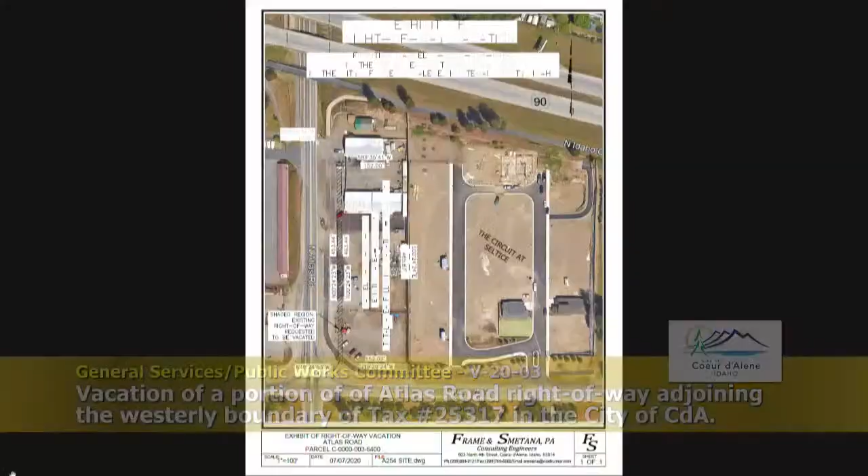It was really surprising looking at this in the staff report at how far over that right-of-way was. Where's the property line for that? The existing property line, if you can see the hand, goes right straight down. The trail is a little deceiving because this doesn't show the updated Seltice Way project, which has a trail right in this area. Also, that trail that's showing is still there, except it's been moved slightly on the corner to get out of private property. There's still a lot of dirt between the vacation and the trail, though. Is that city-owned? Yes, it's very wide. I think the Parks Department wanted about 5 feet for future trees for that project in the right-of-way there. So we could have probably got a few more feet, maybe 15, but it was agreed on to do 10.

Will the widening or update of Atlas that we've been discussing for a while affect down here as well? I apologize if you don't already know that. I've been working on Atlas, I've been here for 21 years, and I know we've been trying to work on Atlas for a long time. I haven't heard the latest on the Atlas improvement, except Chris Bosley mentioned it, but it's a little tight underneath the bridge here, the overpass for I-90, so I don't foresee us getting out any wider than we are. There's probably plenty of right-of-way there.

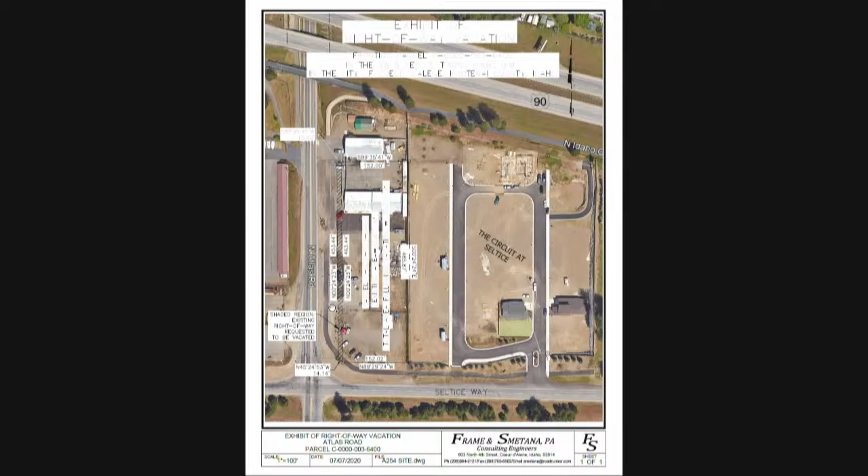That had your question. I had heard from the owner, I'd assume it's still the owner of that property, and they were considering - you said a gas station, but a grocery store kind of thing, probably like a Piggly's or 7-Eleven or whatever they call them. I know that's not part of the request here, but I think that's really needed out there. There's really hardly any commercial services, so if he needs it, then yeah, let's do it. Yeah, it would help, for sure.

Good. Kiki, any questions? I got nothing on that one. I'll look for a motion to proceed with the vacation process as outlined in Idaho Code 50-1306 and set a public hearing for November 17th, 2020. Second. It's been moved and seconded. Other questions, comments? All those in favor? Aye. We'll put that on the consent, please. All right, thanks, you guys.

My favorite area, the water guys. Well, next to the sewer guys, my second favorite. Oh, come on, it's the same water, Woody. Same, jeez, we're on the clean side. Come on, right. Welcome, Terry Pickel.

A little story about the water department. Thank you, council members, for allowing me to come before you today. I'm going to give you a little education on what the water department does. This is just kind of a brief synopsis of it, even though it's 44 slides, so I got lots of pictures for you, Woody. Greetings from our city water department. We are 23 employees strong. We do employ up to about 6 part-time people in the summertime to do meter maintenance, fire hydrant maintenance, and help the crew with construction.

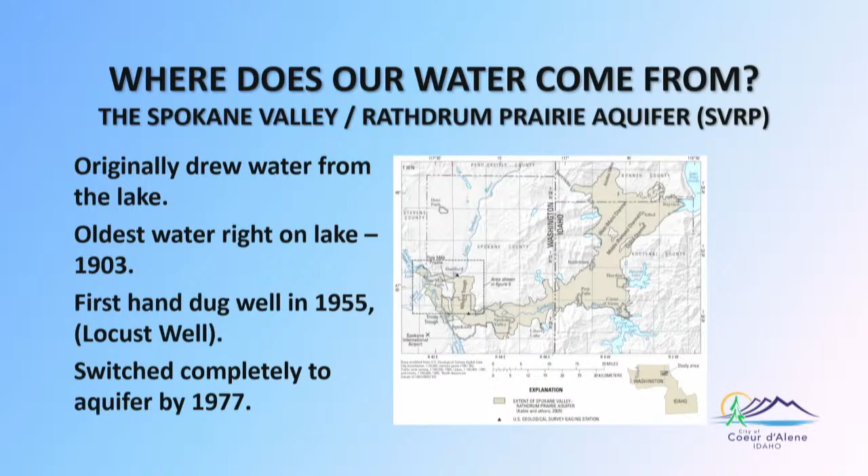Our first hand-dug well was constructed in 1955. That was the Locust well. The next well was 4th Street, and it was hand-dug in 1966. And then after that, they went to mechanical means. We switched over completely from the lake water to solely the aquifer in 1977.

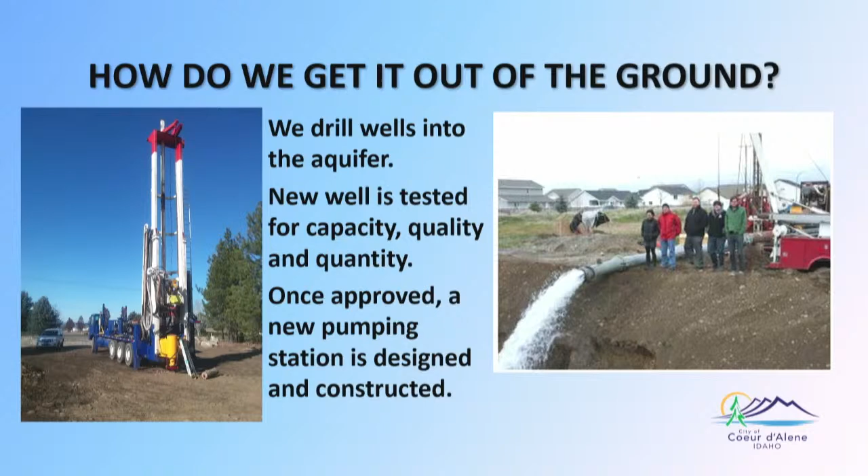So how do we get the water out of the ground? Of course, we drill wells into the aquifer. The new wells are tested for capacity, water quality, and water quantity. And once they're approved through DEQ, we design and construct a new pumping station. The wells pull the water from the source and push it into the distribution system.

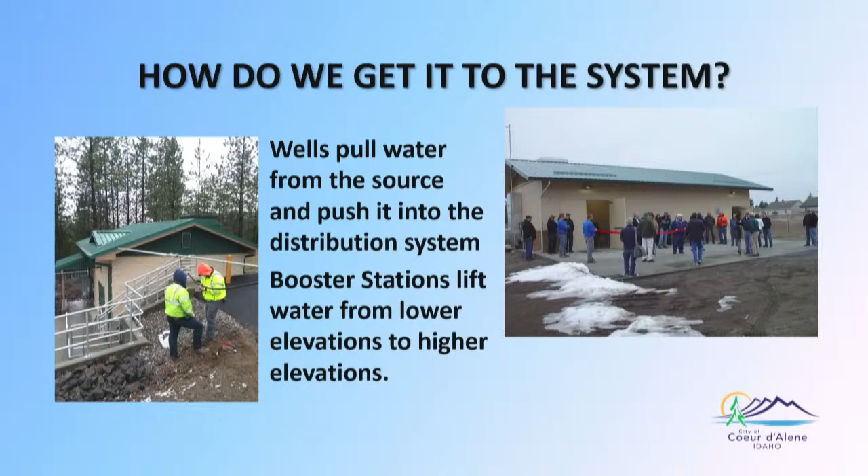Ours is a little bit different than some of the systems. Some push directly to storage. Ours pushes into the distribution, and excess goes to storage. Our booster stations lift water from one lower elevation to a higher elevation to serve some of the outlying areas around the city.

All of our wells utilize vertical line shaft turbine pumps. These have the pumps down in the ground with the motors on top, which makes it a little bit easier to work on. Typically ours are 250 to 600 horsepower, so pretty powerful pumps. They'll do up to about 4,000 gallons per minute, each one of them.

We have booster stations that typically use centrifugal style pumps. They're the best type to use to create pressure, and those usually are 20 to 50 horsepower.

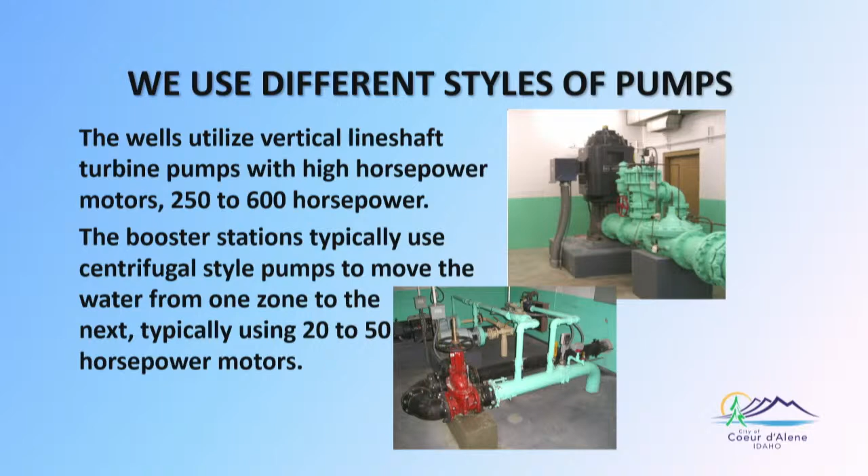Treatment is not really needed. Our aquifer is so pristine that a lot of the areas around the city do not chlorinate. We do because of the size of our system. We have such a large system that the water's out there for a greater extended period of time.

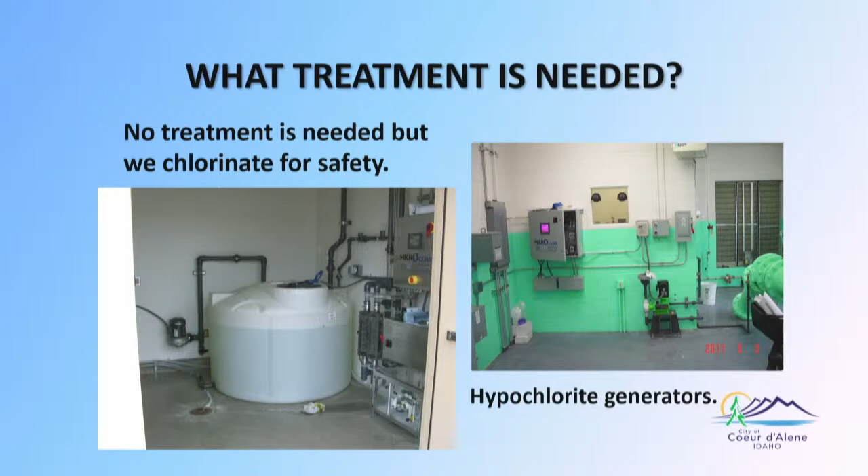So we do use hypochlorite, and these are hypochlorite generators. We used to use gas, which is very, very dangerous. We switched these over, so we're creating a very weak bleach solution, very safe to operate. What we utilize is we take table salt, basically, and run electricity through it and break it apart. That creates our liquid chlorine. Very efficient — we only produce what we need on a daily basis.

What happens to the sodium? Huh? What happens to the sodium? It breaks down and goes back into a brine solution that we end up wasting. Okay.

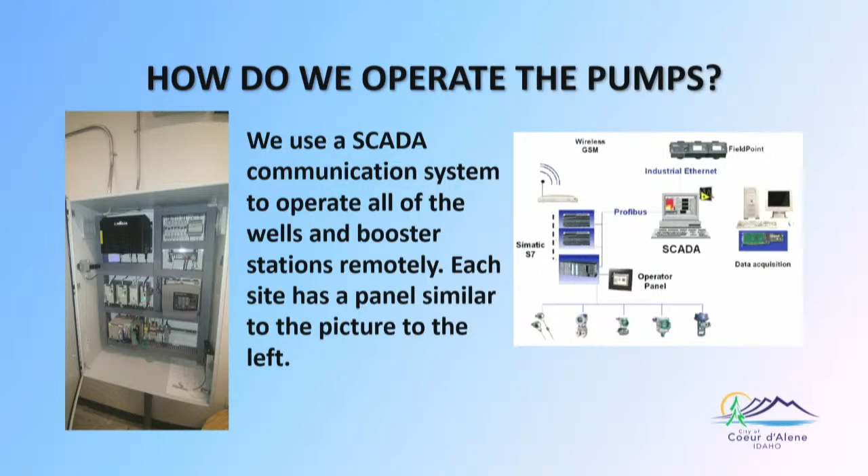We utilize what's called a SCADA communication system to control all of our pumps remotely. SCADA stands for Supervisory Control and Data Acquisition. This is an example of one of the panels that we have at each well and at the water facility to control the entire system. We can access it remotely through laptops or through our computer screens.

We use radio communications between the panels, between the wells, so we've got to have pretty much line of sight, and sometimes we have to install towers. This one is at the old utility site, about a 66-foot tall tower. We're moving it this week up to the other site.

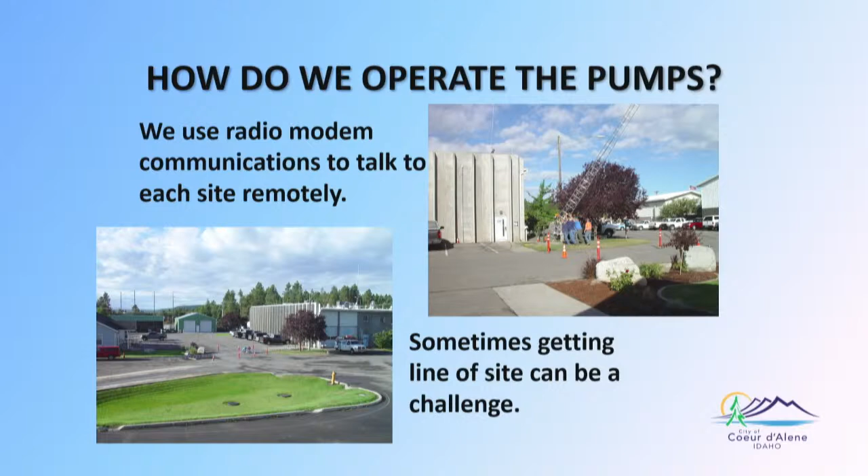We use storage facilities to store the excess water. This is the industrial standpipe being constructed, and I have a very unique video. They constructed the top of that tank inside the tank, then used a cushion of air to float it to the top and welded it in place. I have a video if anyone's interested in seeing that.

That is so cool, very unique. When they got it to the top, a guy stepped out on top of it and controlled the valve to have it float there while 7 guys welded it in place. Pretty gutsy move. Here's a view from that tank looking east over the beginnings of Hawk's Nest, and you can see the Prairie standpipe back in the distance.

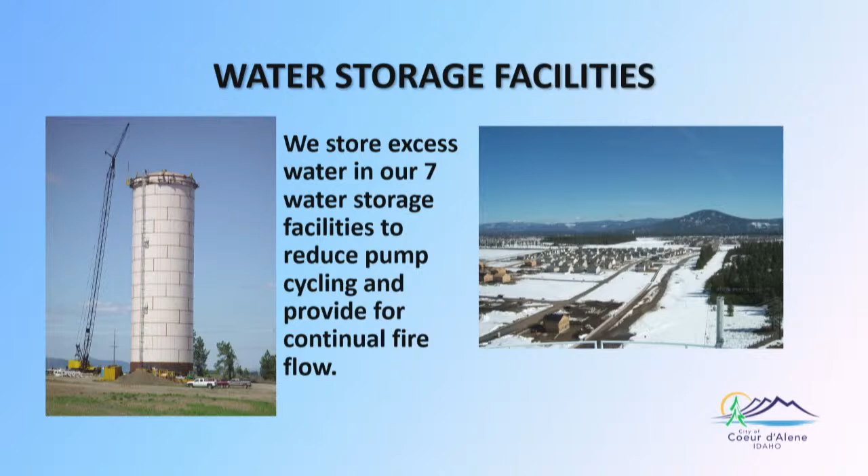We try to keep these tanks as invisible as possible, so we utilize paint schemes to make them blend in as much as possible. The industrial standpipe is seafoam green, so it kind of blends into the sky. We've had people comment that they didn't even know the Prairie standpipe was there and lived right below it. So it does help, but it doesn't always work.

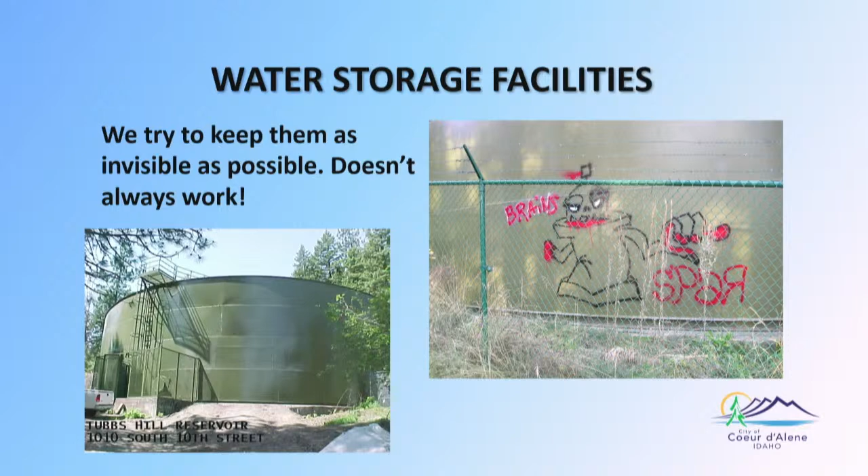You can see we get some tagging every once in a while. We've put up cameras to help reduce that, but they still are brave and go through the fences and do their damage. So we take a kind of look at those.

Where does the water go? It goes through about 305 miles of pipeline. That's what we have in the ground, ranging from 2-inch to 24-inch. We have a lot of plastic, a little bit of ductile iron. We're trying to get rid of the steel and galvanized, and we have about 100 miles of AC pipe still in the ground that we're working on.

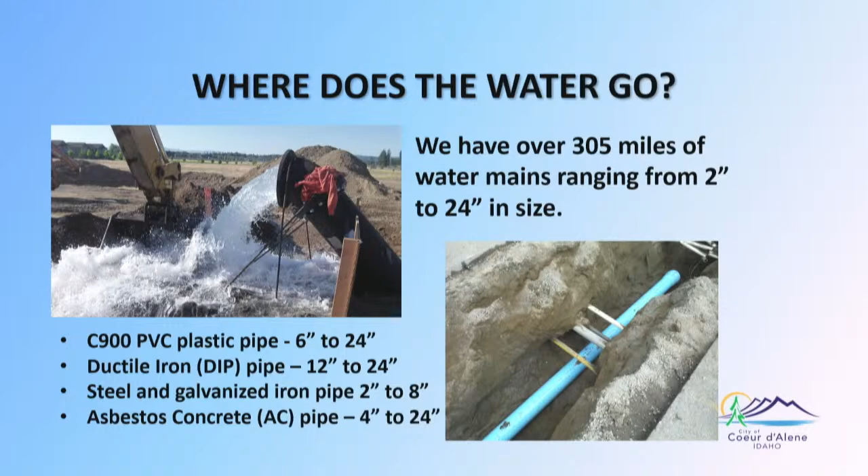New water main construction is done by contractors. No, this is not a California contractor. This was actually the end of Shattuck Lane when they originally constructed it. That's how much they raised the grade in that whole subdivision.

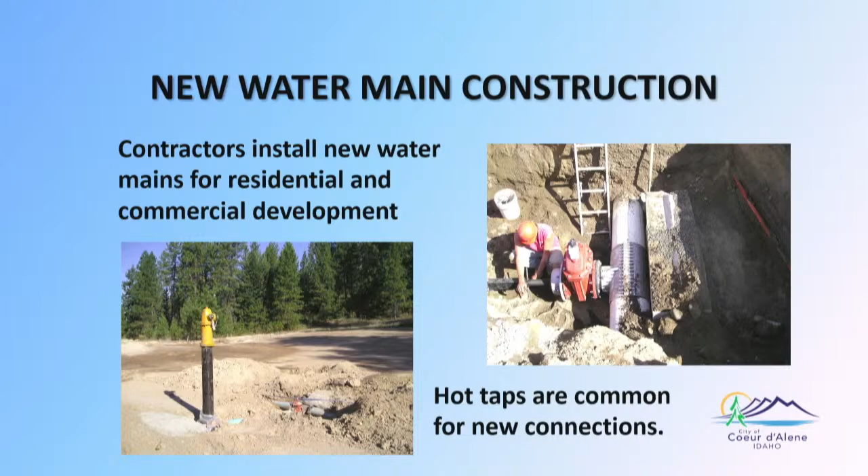Hot taps are typically done on all the new mains, all new main connections, so that we never take a water main out of service if we can help it, because it creates a whole new set of problems we have to go through.

We do routine water quality sampling on a monthly basis. We test 50 water quality samples a month, plus we test for 96 different contaminants on an annual basis.

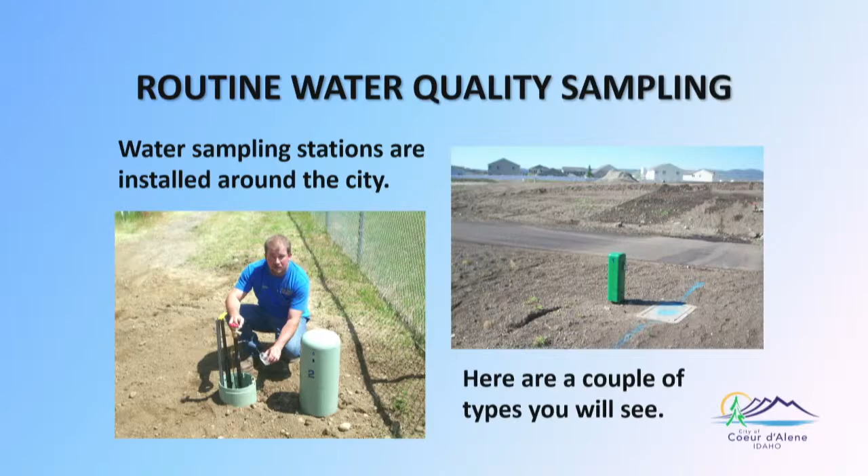Question: do you test the pipe, the water running through the pipe, or different water running areas through the pipe? That's what these little stations are for. They're actually connected directly to the main. Instead of having to go through a house to test them, we pull water directly off of that main, which makes it a lot more efficient for us. We have about 47 of these stations around the city right now, and we're adding more with each new subdivision.

We put service lines in from the mains to the houses and office buildings to get the water from the mains to the buildings.

1-inch and 2-inch lines we can actually do with trenchless technology, so we can punch a water line under a street without having to do too much damage to it. Anything 3-inch and larger has to be open trench at this point. There is technology to do larger - we did try a 6-inch fire line underneath Northwest Boulevard, but it's still a little problematic to deal with. You have to know exactly what you're doing because of the type of pipe that has to go in.

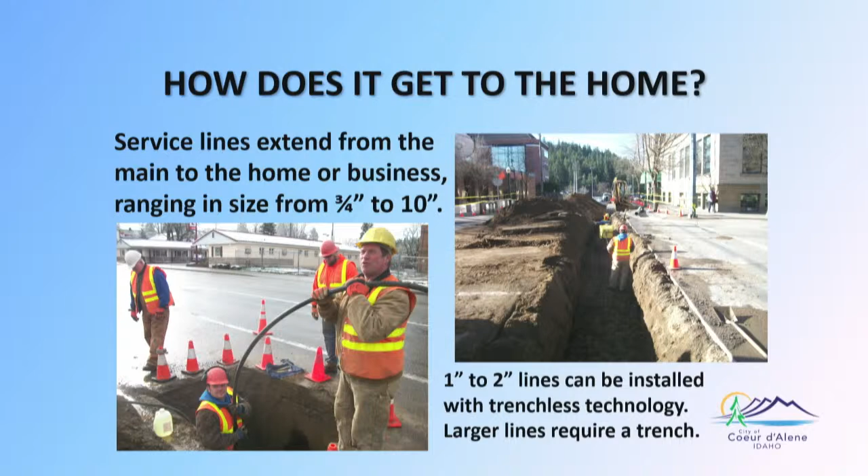That's what we're looking at in the future. New services are hot tapped on the mains, and then we install meter boxes or vaults, depending on the size of the service, at the property line.

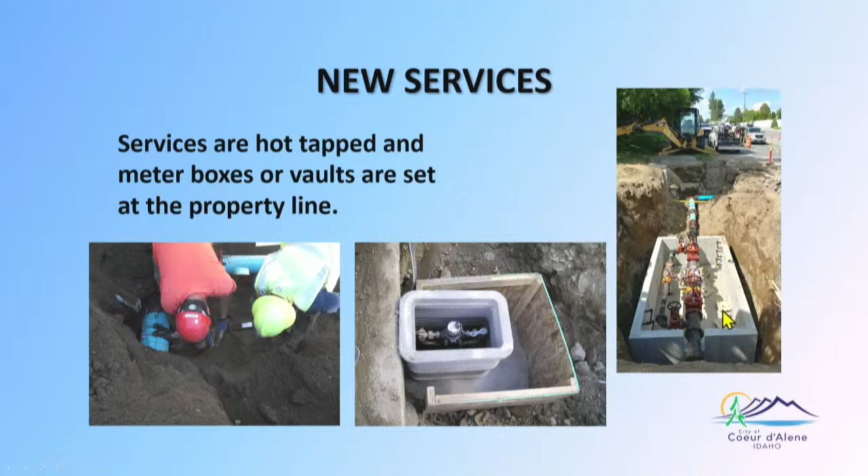We utilize Badger meters to track the customer usage. This was the old style mechanical register, and it had a little bit of a leak dial there, and that was about the extent of the technology.

These are the new electronics, and they can record a leak down to a quarter gallon per minute, and even tell if the meter's running backwards. They'll tell us that, and even if the thing's been tampered with. So they have a lot of technology available there.

The nice thing about these old ones - we had to buy individual heads for each size of meter. This is one size fits all, it's just programmable, so it makes it a lot more efficient for us. Here's an example of what a service looks like: you've got a copper setter, meter, and then your customer service line.

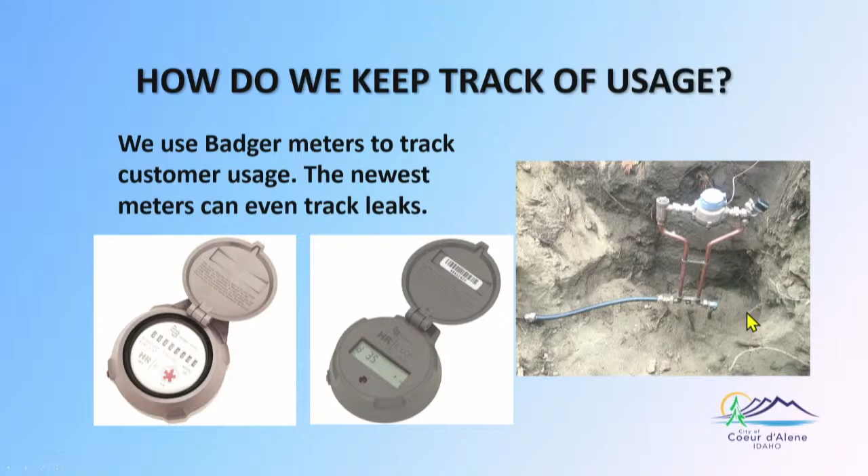We do routine meter maintenance. The battery life on our radio reads is about 10 years, so we're already past the first set when we originally installed these. We're doing about 2,000 meters a year.

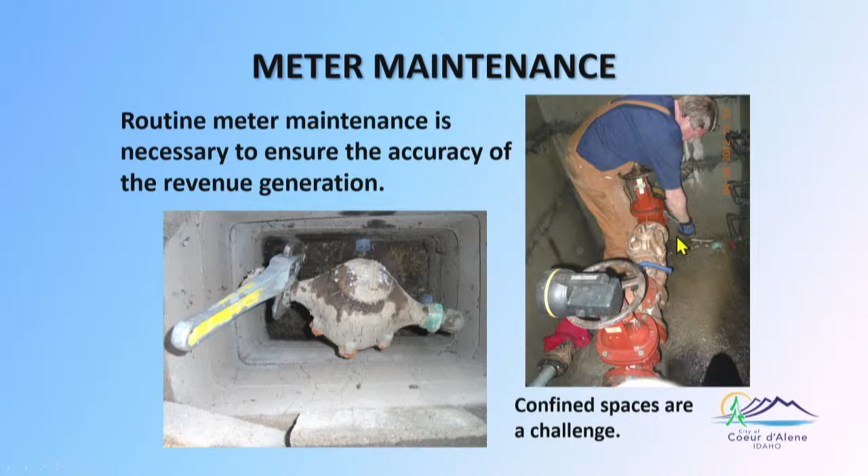We have challenges with confined spaces where you have the larger meter vaults. This one here, Kevin was changing that meter and the thing blew apart on him. He had to get out of that vault before it flooded, so it can be a bit of a challenge.

We're just wrapping up on this year's, and sometimes it's a little difficult to find. Idaho Water used to put these things everywhere. They never put them in a sensible place, so they can be difficult to locate sometimes.

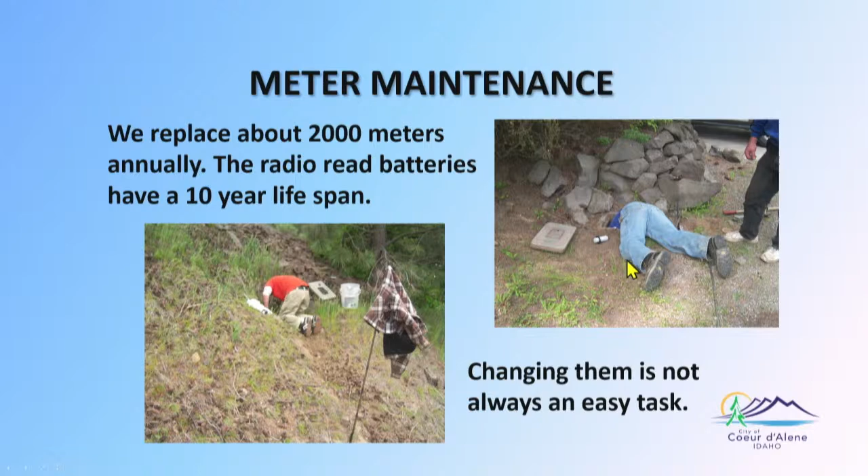Unfortunately, the meters and meter boxes are very ugly, so customers often try to camouflage or hide them. Here you have half a meter sticking out of a basement wall. Here's a buried meter box under about 6 inches of bark. And you can see the gentleman in through the bushes there.

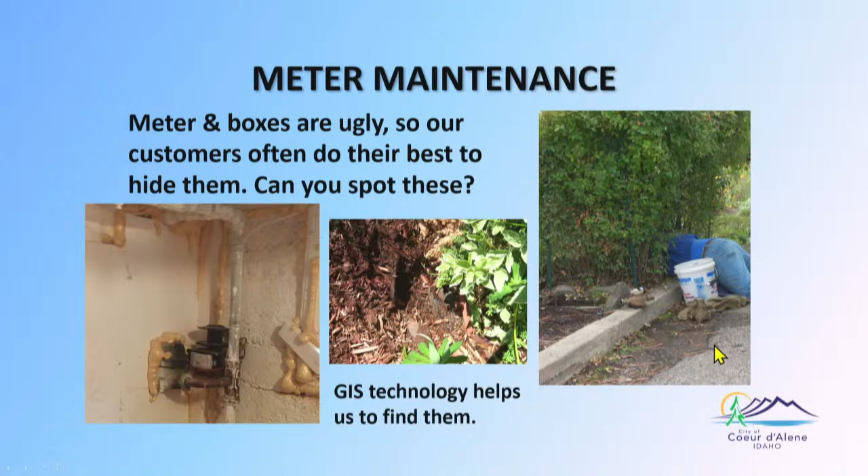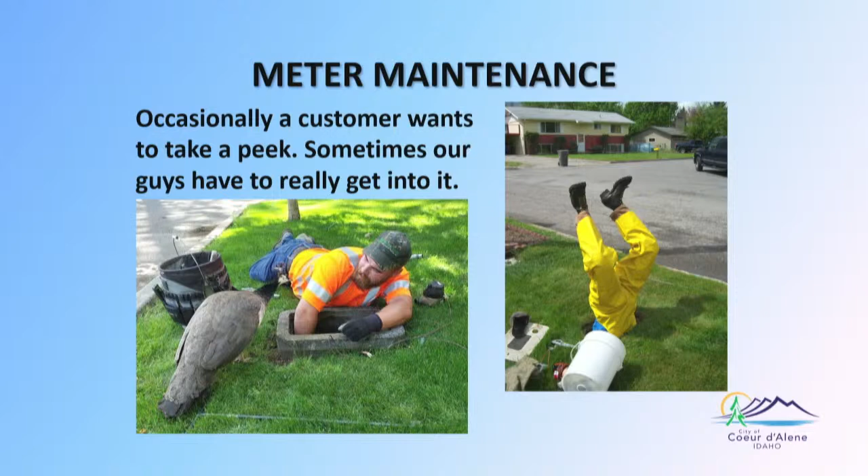Occasionally you get a customer that wants to take a peek and see what you're doing. Some of these are a little bit deep, so the guys really have to get into working on them.

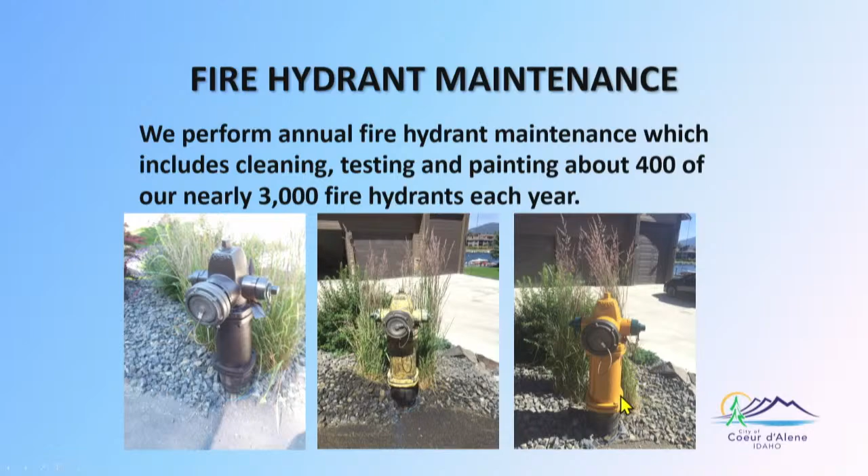Green is usually 1,000 to 1,500 gallons per minute, with a pressure range of 50 to 65 PSI. Fire hydrants are typically designed with a 5.5-inch barrel to flow up to 3,500 gallons per minute, but it depends on the main that feeds them.

We also have to repair the fire hydrants. We typically see around 2 dozen get hit, especially around this time of year when the snow's out and people slide around.

These are designed to break away at the ground level. It's called a traffic flange, so that they don't do as much damage, and they don't, like in the movies, shoot water up. That doesn't happen. These are designed to break in the off position, and even the ones down south that are fully charged all the time are designed to break in the off position. They actually have a flapper, so that's really just a movie effect. It doesn't happen that way.

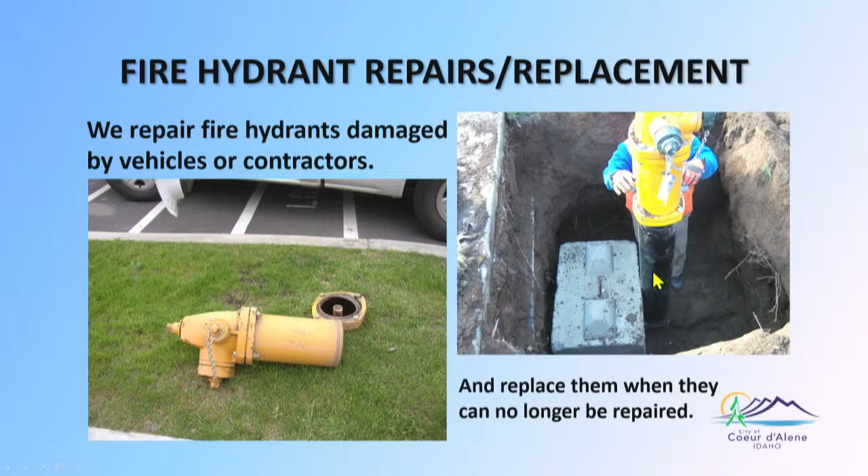That is so disappointing. Yeah, so we're not. Sometimes we have some of the older hydrants get hit, and we don't have parts to replace or repair them anymore, so we go out and replace them with the updated style fire hydrants.

Terry, on regards to fire hydrants, you guys do all that internally with 23 guys? So when they're not changing pipes and doing all that, what are you guys doing in the winter, out there digging? I'll show you some of the stuff we're doing in the wintertime.

In fact, here it is: valve exercising. This time of year is when we start that. We have nearly 12,000 valves in the system, and we're supposed to, by DEQ standard, go out and exercise those on an annual basis.

So we have put together this unit that has a vacuum on it to clean out the valve boxes, and a hydraulic valve exerciser that reaches out about 20 feet from the vehicle to get remote valves if we need to exercise them on fire hydrants, mains, intersections, and everything. Plus, it has a GPS system that attaches to it, so we can record that on our GPS maps. It tells us what size that valve is, how many turns, condition of it, and location, so we can find them a lot easier.

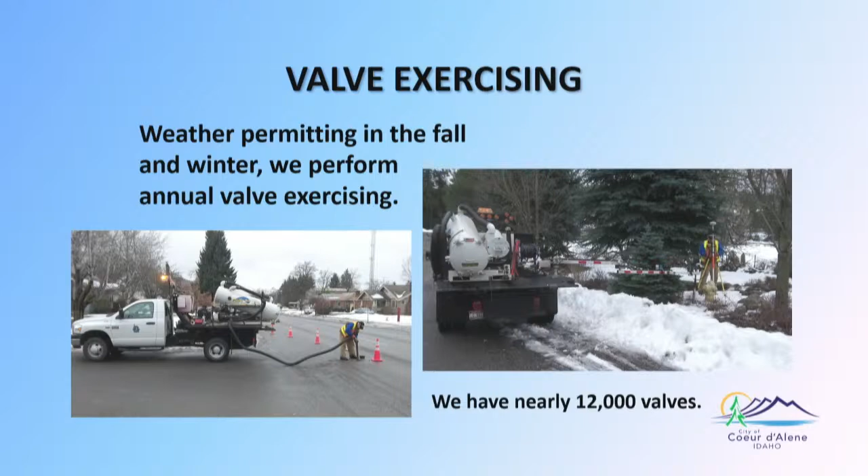Right now, we're approaching the 12,000 device mark that we're monitoring on an annual basis. That is equivalent to what Spokane does, and they have 4 times the connections we do.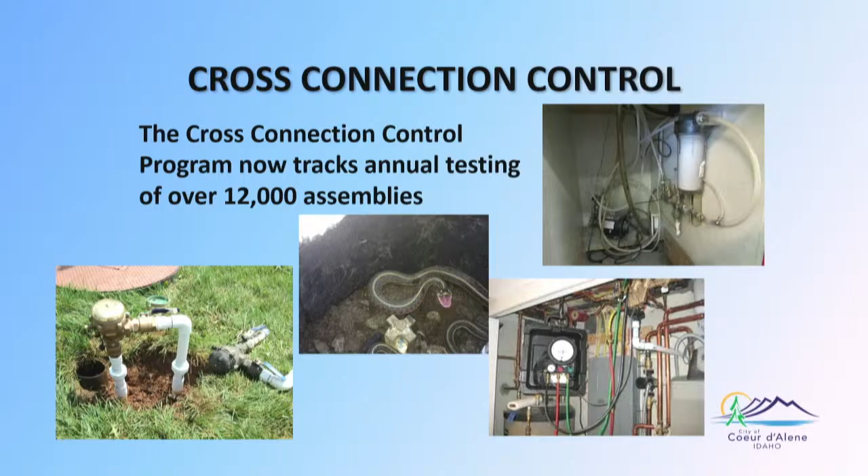Terry, is this the same as the backflow valve? Yes, it's the same thing, different verbiage. Backflow permit is what we're talking about. When you hear backflow, it's actually cross-connection control, that's the proper nomenclature for it. But yes, this is our backflow program. And that's what people have to pay to have inspected every year, on an annual basis, okay.

So you mentioned earlier that the meters can run backwards. Occasionally, yes, so that's backflow. Why not have the meter also be kind of a backflow thing, or is that too complicated? They do have that, they're not fully approved yet, but they do have some of those systems set up. On our copper setters that you saw earlier, it actually has what's called a dual check, so it prevents that for the most part. That's on the newer ones. The older ones out there still don't have that, but we're trying to get those all updated as we can afford and get time to do. Very good. So those do have some modicum of backflow protection.

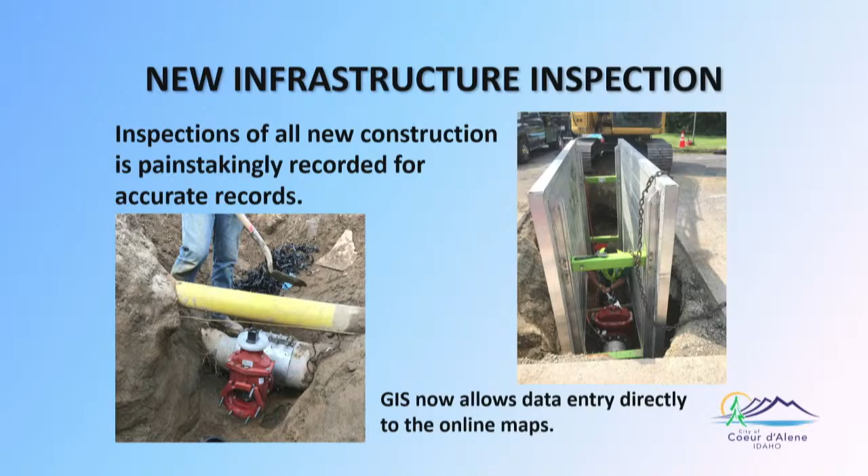Our guys do new infrastructure construction inspections, so when there's contractors coming in and doing construction, we're out there making sure they're doing it to our standards. Plus, we're also taking our own shots on those valves and fittings and putting that directly on our map. Working with Debbie Frisbee, we can now actually shoot that on site, take pictures of it, upload it immediately. Within 10 minutes, it's on our map, so we can look at it from the office and see daily progress in what they're doing. Pretty neat system.

Occasionally, Mother Nature decides to lend us a hand. When you get these torrential rainfalls, water leaks just seem to pop up in the street all over the place. People don't realize it's the storm drains backing up and flowing out, but we get the calls.

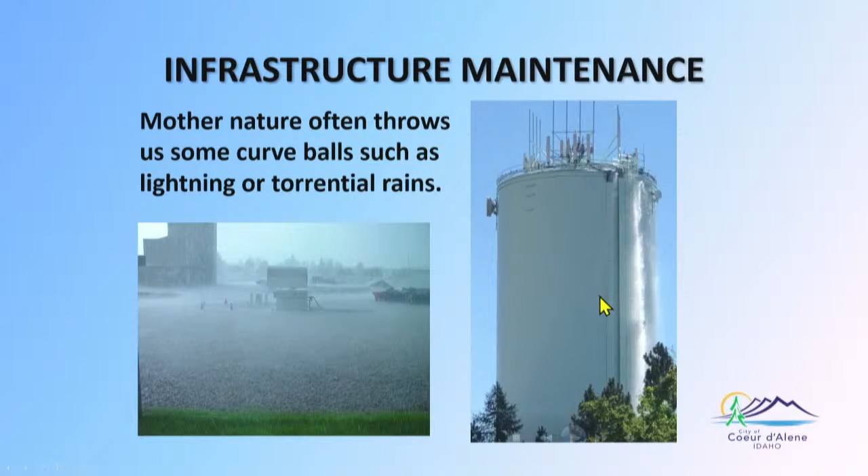Last year, about July 2nd, we took a lightning hit at the Ramsey site that took out our entire system. There's a YouTube video on the web where you can actually watch this water cascading over the side of that tank. Somebody got a video of it. The control system went down and the pumps just kept running with no level control. The SCADA was down, and it was overflowing.

Well, that's actually kind of lovely. We should probably do that for like 4th of July or something. Pretty easy to do, really.

Eventually, all infrastructure fails. This is a huge problem plaguing the nation, and we're trying to do our best to keep ahead of it. So we have a main and service replacement program in place that we do on an annual basis, but we still have to deal with these leaks.

Unfortunately, Idaho Water didn't like to put water mains under the street, where it's a little easier to control. They put them along the rights of way, and here we had to take out shrubs and everything that had been planted over the top of it. We hate to do that, that's why we don't allow it any longer.

This is over on Blackwell Island, the 12-inch main that feeds Blackwell Island at the marina. A couple of winters ago, it broke right there, and we had to go out and fix it.

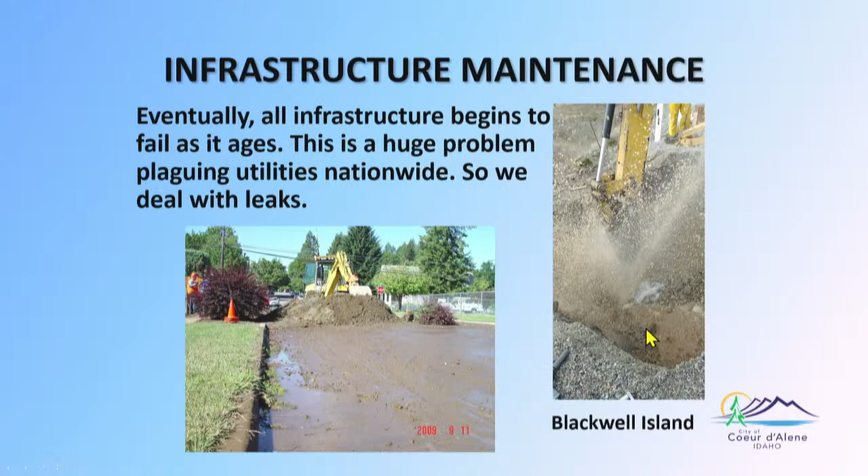As I mentioned, they don't like to put them in streets, so here's one down over a 10-foot bank. We had to lower the backhoe down over the embankment to get to the leak, and then pull it back out with the loaders.

In March of 2012, there was a 3-foot section of wooden water main that nobody knew was there, and it blew out. On a very snowy morning, we were getting ready to start a major project, and it took out a block of Dollar Street and washed sand and clay down into Jerry Jager's driveway. A 3-foot section of wood water main that somebody had forgotten about decades ago - the banding all disintegrated and it just blew apart, washing out the road all the way down to the next intersection.

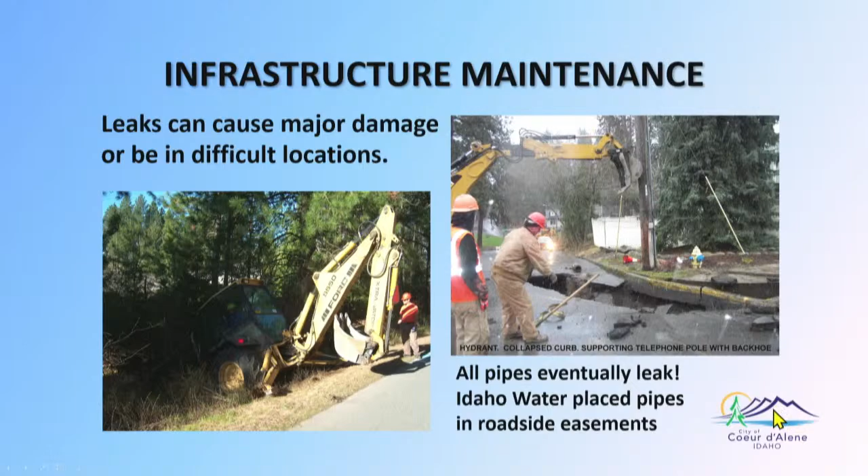So we probably don't know whether there's still wooden pipes out there. We hope not - we thought we had the last one out in 2004, but that one popped up, so who knows what else is out there to rear its ugly head. It's pretty amazing that it's lasted this long. It's probably been in there close to 100 years. It's crazy.

Our crew does the water infrastructure replacement. We do farm out some of the projects, but most of them we do in-house. The problem is we run into a lot of buried underground utilities, some known, some not known, so we're always fighting that to get this stuff in the ground. Makes it a lot more complicated.

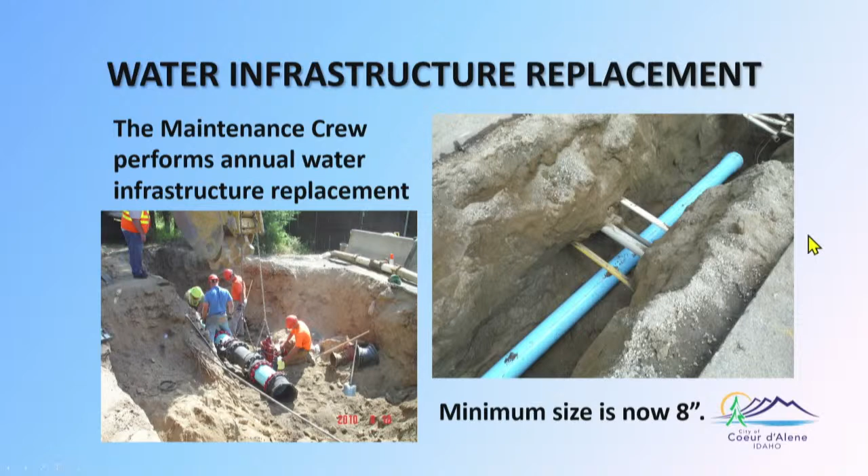Sometimes you run into stuff you never even thought was there. This is a 4-inch water main that was installed by Idaho Water. Instead of tapping it directly to the main, they used four 1-inch service lines to cross across and hook it up. 1-inch service lines don't equate to a 4-inch line, but that's something we found. You're wondering, what were they thinking - they ran out of 4-inch pipe? Or maybe they couldn't find a saddle or a tee to put in there.

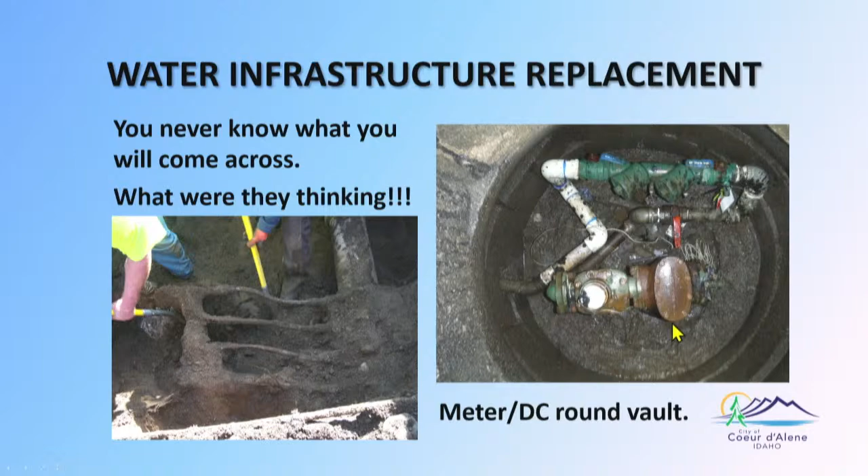And then this was an irrigation hookup that a plumber had put in the meter box. That really was quite unique - pretty creative. Took a lot of work to get that plumbed in there.

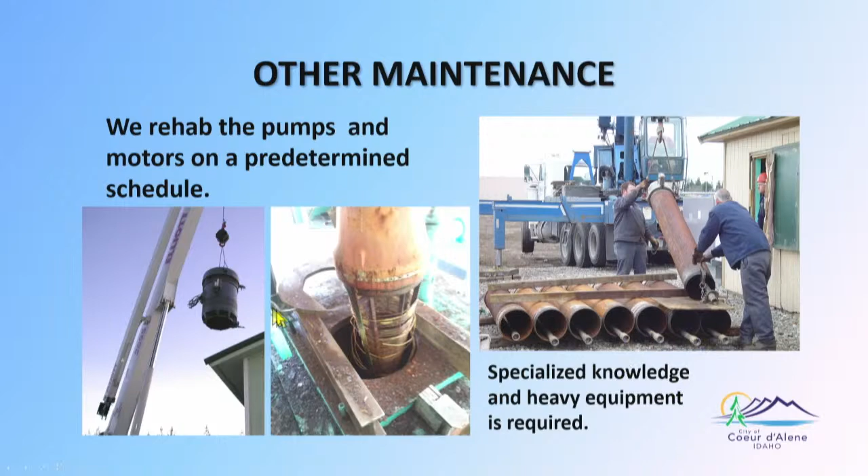We do rehabs on our wells on an annual basis, and some of those wells hadn't been out of the ground in 20 years, as you can see from the condition of this suction strainer. It takes a lot of specialized knowledge and some pretty heavy equipment to get these things out of the ground. Those things weigh 27,000 pounds with the water in them, so it takes a pretty good-sized crane to get them out, and those motors are 800 pounds apiece. We don't have any more submerged motors - no, we've done away with those.

We do routine maintenance of storage. This one was the Best Hill standpipe - the last time we drained it down and cleaned it manually. Now we utilize ORVs, remote operated vehicles, and they can actually go in, vacuum, use scrub brushes, and check the coatings on the inside of the pipe. They have cameras, so we can check the structure too. Makes it a whole lot easier.

Plus, the tank can remain in service rather than having to drain it down. We still definitely had to do that for our standpipes because they're 160 feet tall, so you couldn't get a diver in there anyway unless you brought them down halfway.

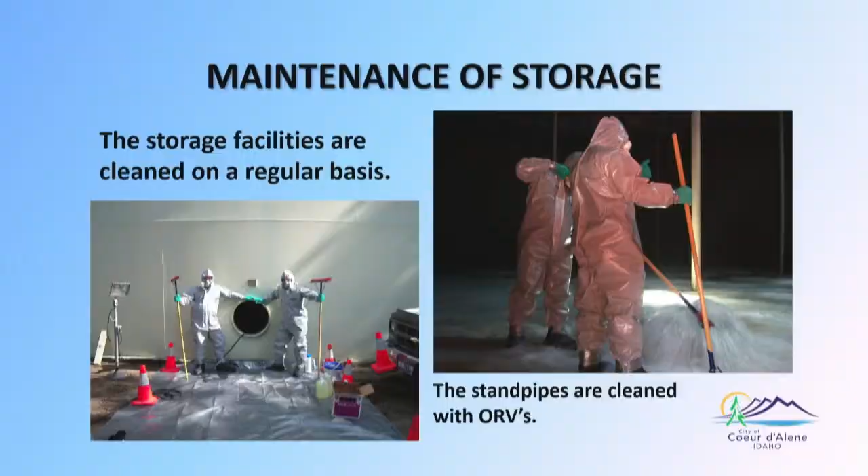So it's actually cleaned with the water in it? Yes, it's cleaned with the water still in it - they have an underwater vacuum that goes in there and can clean them out. Our tanks and our water quality is so good that we've had very little trouble with that. Last summer we did the tank at Armstrong - it hadn't been done since 1989, and there was only an inch of silt in there, and that was it. Most places get 3 to 4 inches of silt in 5 years, so we are very lucky with the water quality we have.

So in the wintertime, we do our own fleet modifications. This is that unit I was just showing you that does the valve exercising. Our crew built that, actually designed it and built it. The manufacturer that sold us the equipment now has that as one of their options, they can build a similar unit. So we're pretty proud of that.

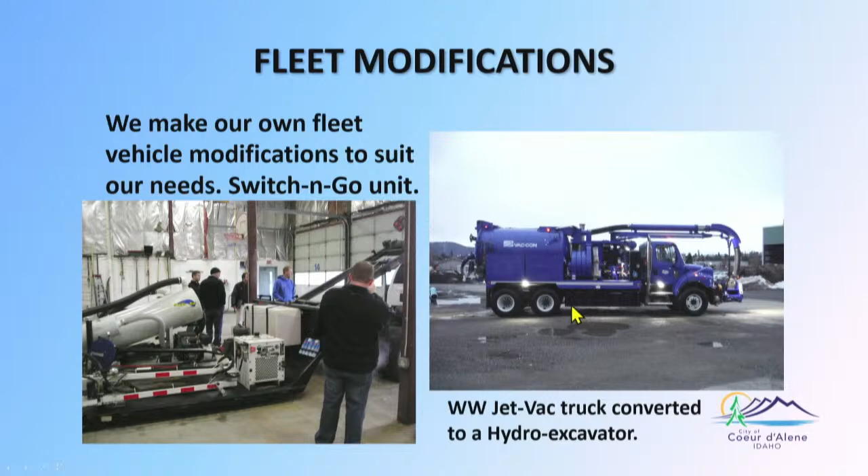And we've taken the old Big Blue and recycled it, turned it into a hydro excavator. This is one of our key pieces of equipment now because we can dig around utilities without the use of a backhoe and prevent damage. It's very instrumental in doing that, and it works very, very well.

Once in a while, we get to showcase our abilities. This was a CAT rodeo back in 2011, and we get to go out and compete with neighboring operators and show them what we have capabilities of doing.

So this one, we're taking volleyballs off the top of a cone and dropping it into a standard garbage can. This one, you're taking and stacking 5 tires, had to be standing straight up. This one, we had to knock tennis balls off the top of the cones without knocking the cones over. And this one, you had to back that truck and trailer 100 yards through a series of 3 cones.

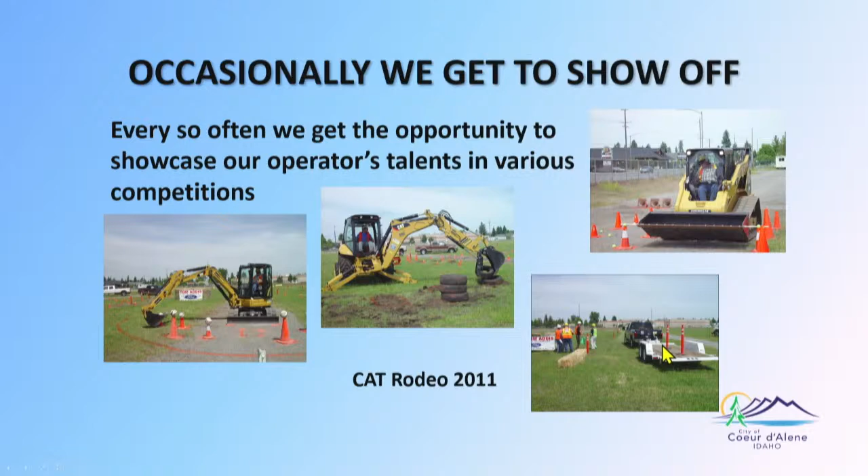I did that in 32 seconds. One of my operators did it in 25. Would this be on ESPN 8? No, not usually, unfortunately. It'd be interesting watching some of the people, though.

Some of our recent accomplishments, of course, our Best Hill Booster Station in 2017. The initial bid was way beyond our budget, so our guys went out and put in all of the piping and saved us about $275,000 on the next bid. The contractors had to come in and build a building around it and put in the inner controls and stuff and the pump, so that saved a lot of money.

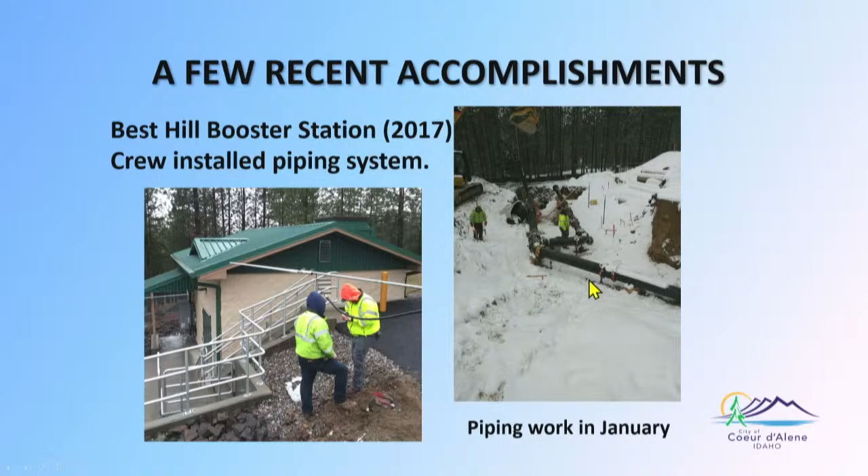Unfortunately, with the timing, we had to do this in the middle of January, so it was cold, everything was freezing and snowing, but the guys were troopers and got it all done and did an excellent job. The contractors were extremely impressed.

The Huetter well was drilled down to 363 feet this spring, test pumped at 4,200 GPM with good water quality, and we're now working on the design for the new well house.

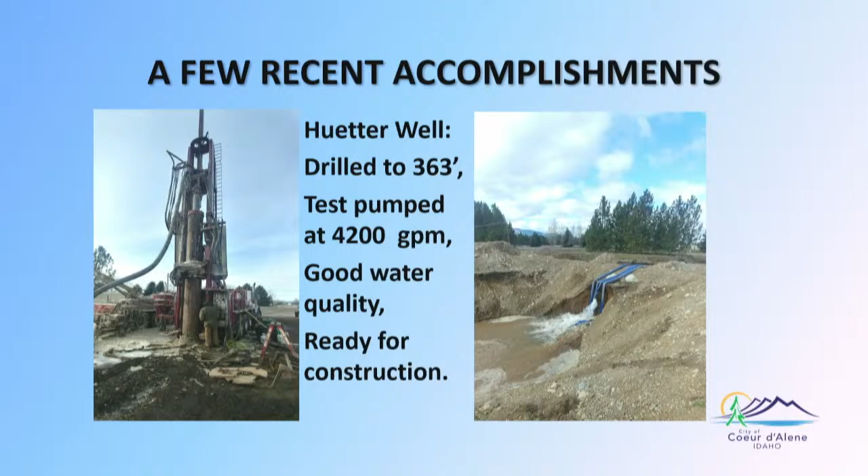Terry, we've tried holes in different places - too much sand or not enough sand water, or arsenic. Arsenic's been our biggest enemy.

This one we lucked out on - look at how it came out, very clean. Arsenic was at 2.5, the limit's 10. The only problem we have with this one right now is somebody knocked the cap loose and dumped some wood and rock in the bottom of it. So we've got a contractor that drilled it, going to come back next month and clean it out for us. But we've took water quality samples, everything came back good.

Is 363 feet the norm, about the average? About right, yep.

About 350 to 370 is about average. We hit water level about 260. We need enough depth to draw the 4,000 GPM that we want. We're blessed, aren't we? Yep, we are. This is one of the best aquifers in the United States.

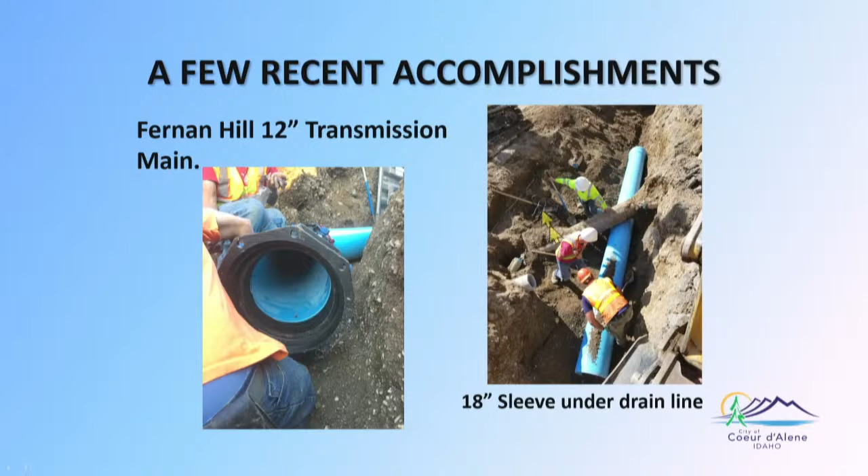We did the Fernan Hill 12-inch transmission main last summer as well. That was a bit of a challenge with the proximity of all the utilities in Boyd Avenue and Hedberg, and we had an untried contractor that threw us some curveballs. This is actually my crew putting in a sleeve for them that they hadn't counted on doing.

We appreciate what council allowed us to do. We got our new building built.

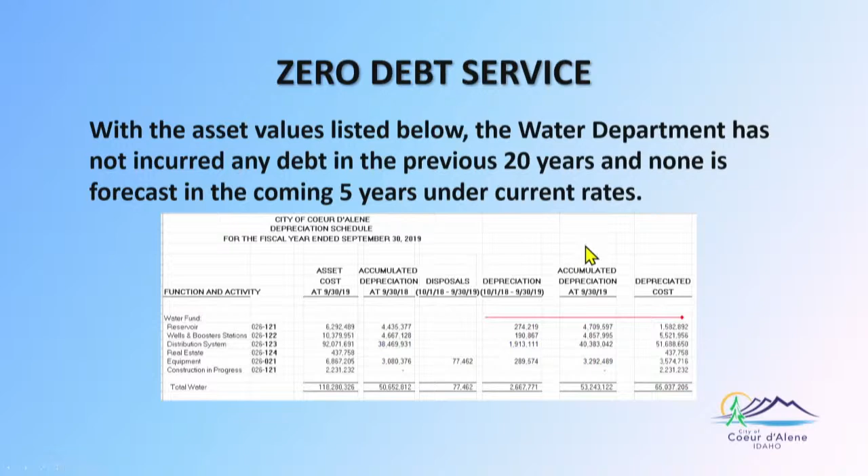One of the things I wanted to point out is we have almost 118 million in asset values for the system. We have 0 debt service, and we haven't had debt service in the past 20 years, and we don't forecast any in the next 5. Outstanding.

Upcoming projects: the Huetter Well construction and Trails transmission main should start in the middle of next month. We're still working on the design for the Atlas Centennial Trail transmission main. We have some issues with ITD and the Federal Highway Administration on that one, so we're working with them trying to smooth that out.

The Blackwell transmission main will start in the next couple of weeks, that's over on the other side. We're replacing the existing transmission main up the hillside in a different location. We were able to work out and get a new booster station site as well. We're still hunting for the Canfield and Fernan tank site locations. We think we've got the Canfield one nailed down. We're still looking for Fernan sites.

The Elm Street switchover is moving about 60 homes from the high zone there to the general zone to free up capacity in that system and on that tank. We've got 50 of those homes already done. We've got to replace a main next summer, and then we'll get the last 10 done. That should free up capacity in that tank, move down the use there, and make things a lot better for the folks in that area. That's been a big plus, and I haven't had any calls last summer on that. So that was a real big deal.

Thank you for joining us, from the past superintendents and myself. Unfortunately, Ralph passed away this last year, and we're going to do a little tribute to him in the new department, because he was instrumental in getting this system up and running, and Jim was a big boon to it too, and we've tried to keep things going in a good, logical manner.